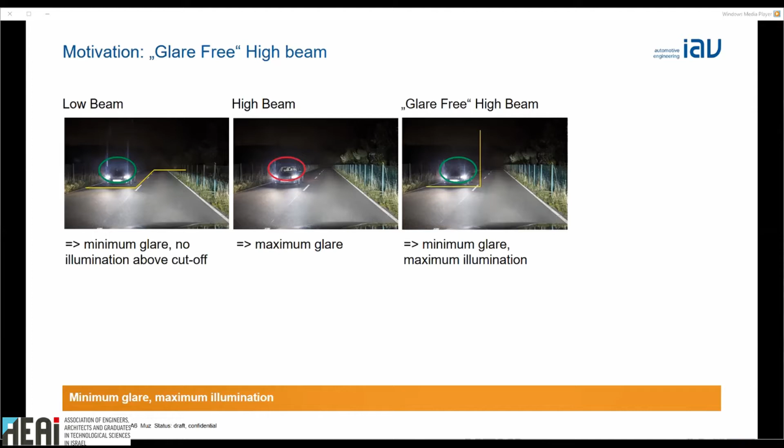And so the glare-free high beam was invented. Here only the part where the oncoming car is detected is dimmed, and the rest of the traffic space above the cutoff is still illuminated, so you have minimum glare and maximum illumination.

The first of these systems came into serial production 10 years ago, and they were mechanical, but we prefer digital systems in automotive industry. So we came to matrix beam, where you can turn on and off LEDs separately. The first of these systems had around 25 pixels, and there was an evolution to more pixels, so you can dim out very exactly and sharply. In the last years, some high resolution LED modules were developed, which will come into the car, into serial production within the next years.

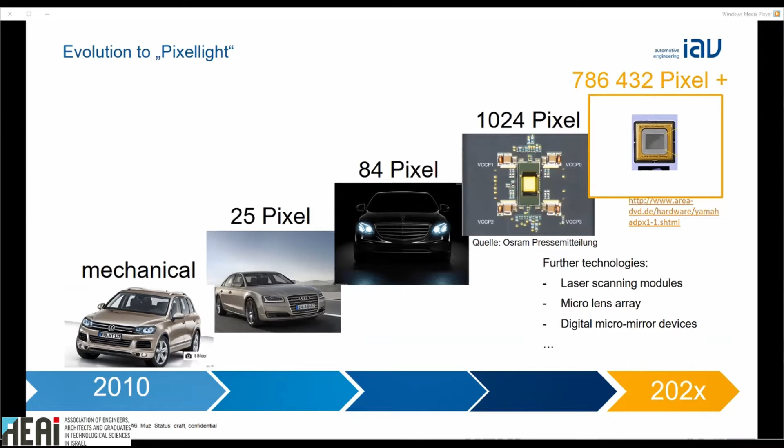One of our contributions to this development was the design of a test bench for dynamic tests on such LED modules. We did this in cooperation with Infineon. Infineon developed the LED module and integrated the micro AFS chip from Osram, and we designed this optomechanical setup in hardware and software, and also developed the test specification. As you see in the photograph, this LED module allows high resolution light functions.

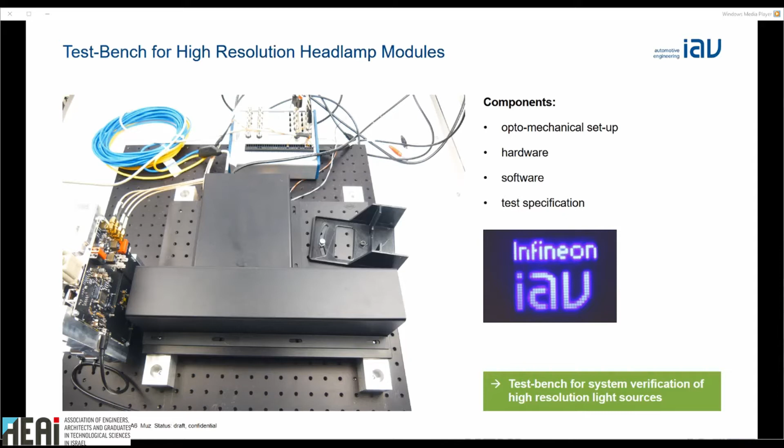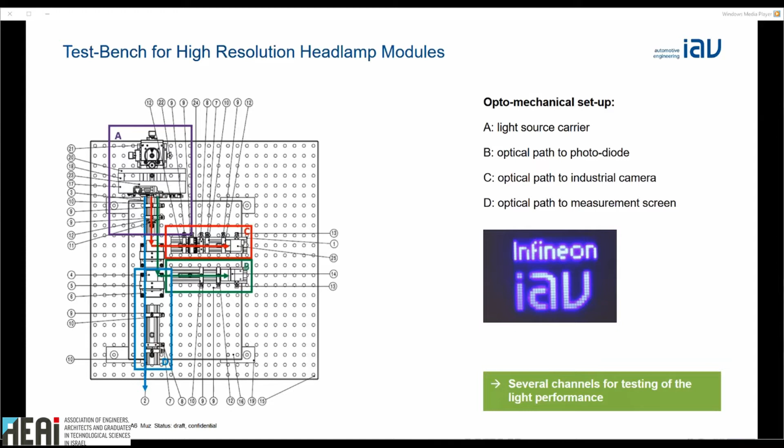Here we see a scheme of this test bench. The LED module is mounted at A, and then we have 3 optical paths. In B, we have a photodiode for integrated measurements of the light flux, and in C, an industrial camera for measurements in spatial resolution, and in D, we have a path to a measurement screen in order to make photometric measurements with a luminance camera, or in order to observe with your own eyes.

Not only the component is to be tested, but also the whole system, which consists of a sensor, normally a camera, and some intelligence located in the control units, and then the actor, the high resolution pixel light headlamp. Our solution is presented in the video on the next slide.

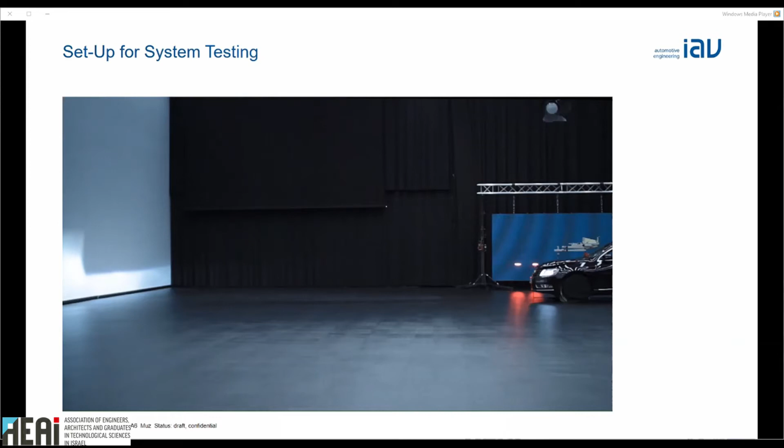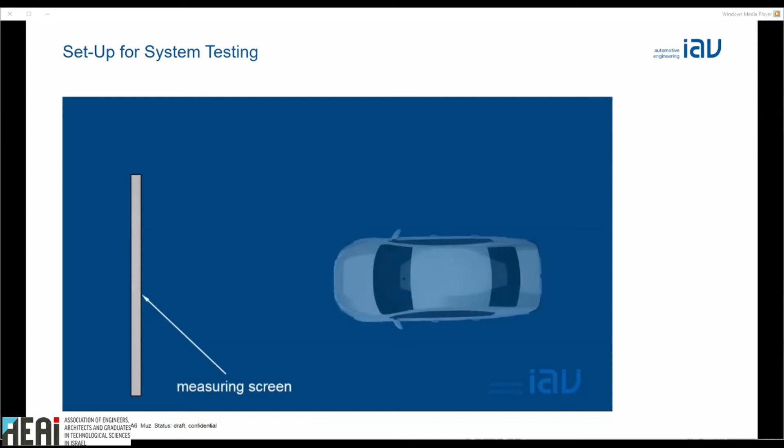On the left, you see a measurement screen, and on this measurement screen, the dynamic light distributions of the headlamp. In the background, there is an LED screen where we simulate the other traffic participants, and the LED screen stimulates the camera, which is located near the mirror.

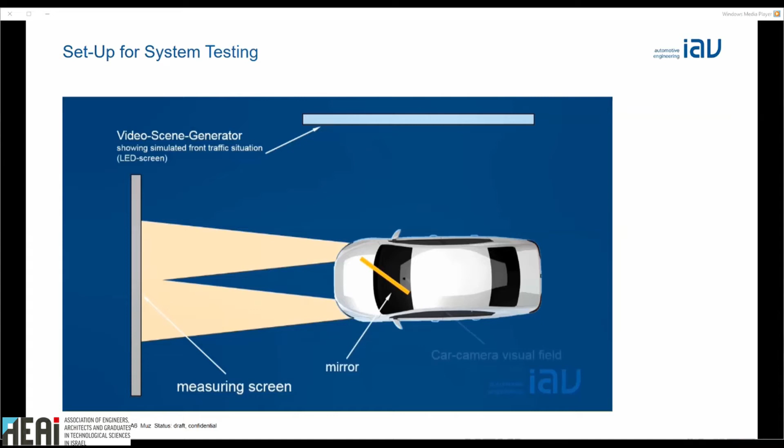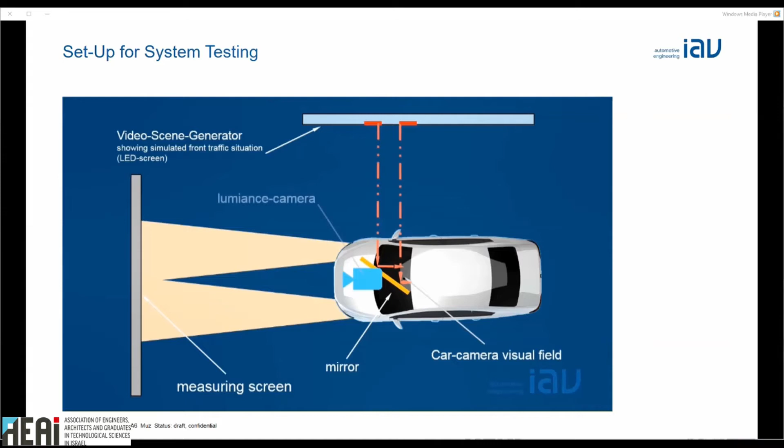We use a luminance camera for quantitative photometric measurements. This is how it looks like. You can use these quantitative luminance measurements as an input for light simulations in order to make a deeper analysis of your light distributions and the system.

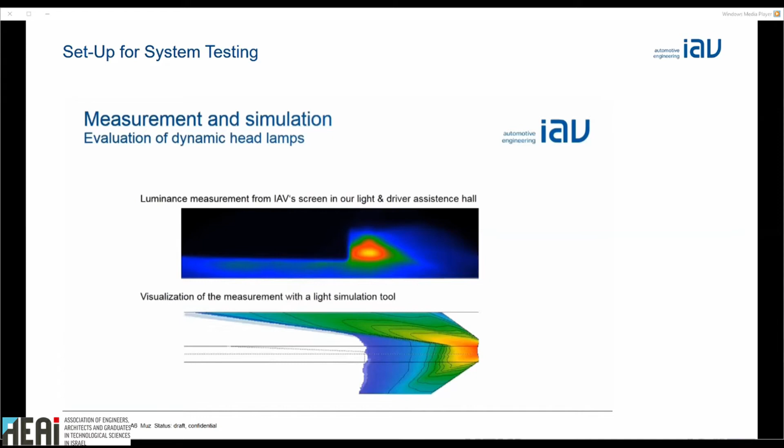There are still some challenges to solve. First, we have a parallax between the camera sensor, which is mostly located near the mirror, and the headlamp. So you have to make a coordinate transformation in order to dim out the right part of the traffic space. The object detection is a challenge. And we have to answer the question where the intelligence of the system is located and how the data are transported from the sensor to the actor. And when we have pixel light systems, this is, of course, masses of data.

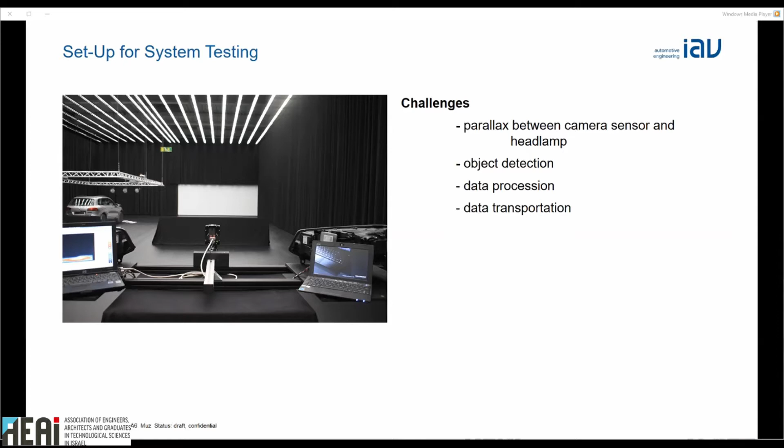Now I would like to give some solutions. We are talking about automatic driving in level 4 or 5. This means highly automated or autonomous driving. Here we require a lot of sensors in order to sense all of our traffic space around us, and maybe these are 50 or more sensors. We see that the lamps of the car, which are located at the edges of your car, are strategic positions for perception for most situations. So we made a project with ZKW, the project Dragonfly, and here we integrated sensors directly in the headlamp.

On this slide, we see some of our experiences in autonomous driving. One is the Renault Symbioz demo car, and another is our HEAT project. This is a bus for public transportation, and it is moving automatically in Hamburg HafenCity.

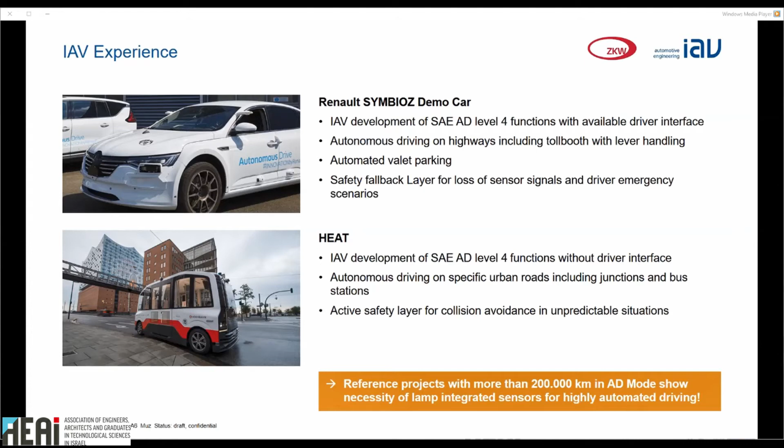Another use case are the advanced light functions, and so I come back to the first part of my talk. The camera, the sensor, the ECU as intelligence, and the actor, the pixel light module, are located in one housing, and you solve a lot of problems. You reduce the complexity of your system, and you also have the same optical axis for the camera and the pixel light module.

So the world is much better now. Now my time is over and I have to summarize.

I showed that high-resolution headlamp modules are new technologies which give the opportunity for new dynamic light functions. We developed test setups for dynamic component and system testing. I showed some challenges and gave an example of how these challenges can be solved. And I showed a concept for sensor fusion for highly automated driving. Many thanks.

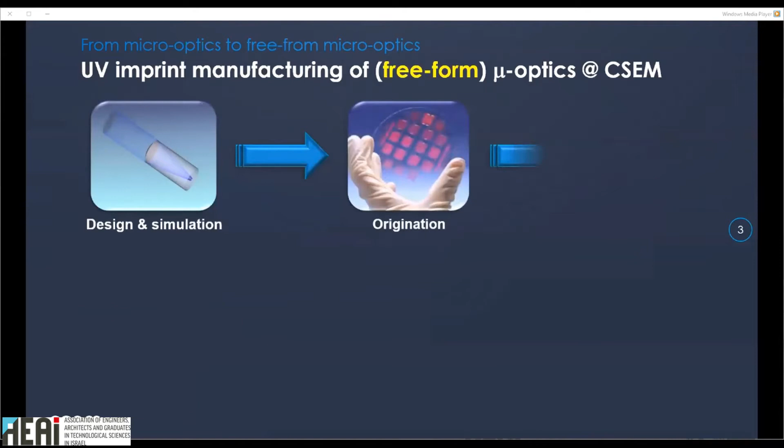First, let me introduce my company, which some of you may not know. CSEM is a Swiss private company, non-for-profit, that deals with technology transfer. We develop technologies and technology platforms that we then transfer to industry. The activities I'm responsible for are in the field of micro nano optics. How do we do micro nano optics at CSEM? We do it by UV imprints.

We start always from designing and simulating the structures that we want to fabricate. To fabricate the structures, we produce what we call an original, which contains the original structures we want to fabricate. It can be, for example, in glass or in quartz. Out of this, we produce a nickel shim, which is the tool we use for production. To produce the structures, we put a UV imprintable lacquer on a substrate, then we come with the tool, press, and shine UV light. When the light is absorbed, the photopolymer is cured and hardened. Then we demold and the structure is transferred onto the substrate.

We can do this for prototyping on 6-inch wafers, but we're also pushing forward our capabilities and bridging the gap between prototyping and volume production in two ways. On one hand, going for larger surfaces — we are installing new machines these days from a company called Morphotonics, which is a roll-to-plate machine that will allow us to go broader than 6 inches. We are also pushing forward in the Death Valley between prototyping and production, which is the piloting phase. When it comes to volume production, we transfer the production to our industrial partners.

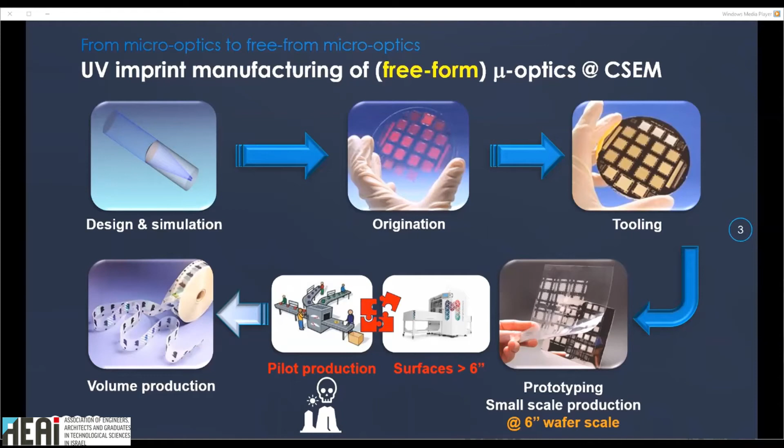And we are nowadays pushing this, after several years of experience in nano and micro optics, into the field of freeform micro optics, where we are leading a European project that is meant to set up a pilot line for the manufacturing of freeform micro optics, Fabulous. Before telling you about Fabulous and how it's linked to automotive lighting, I would like to tell you about freeform micro optics.

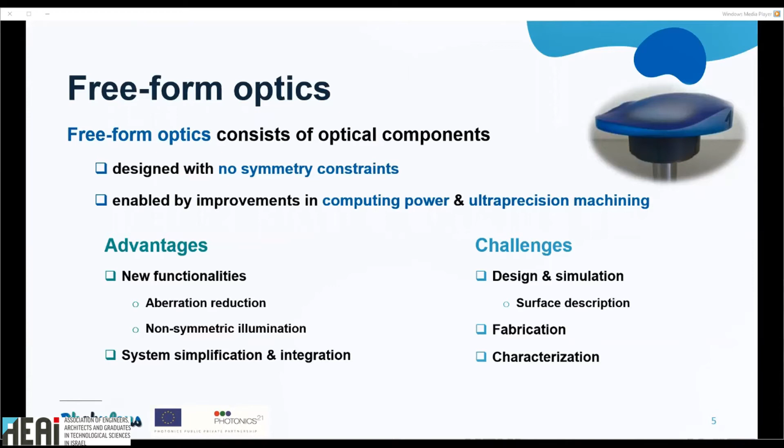For sure you know freeform optics, which is today a product reality in automotive lighting. These are optical components where you remove any symmetry constraints on the surfaces. What you can do is add new functionalities, simplify your optical systems, and easily integrate these new optical systems, for example, in lighting systems containing LEDs.

You also know micro optics. These are, in general, for example, microlens arrays that allow you to miniaturize your optical system, add new functionalities, go for low weight and large area optical elements, which can be flexible or conformable, and low cost at mass production. Now you put together the two domains and you have freeform micro-optics.

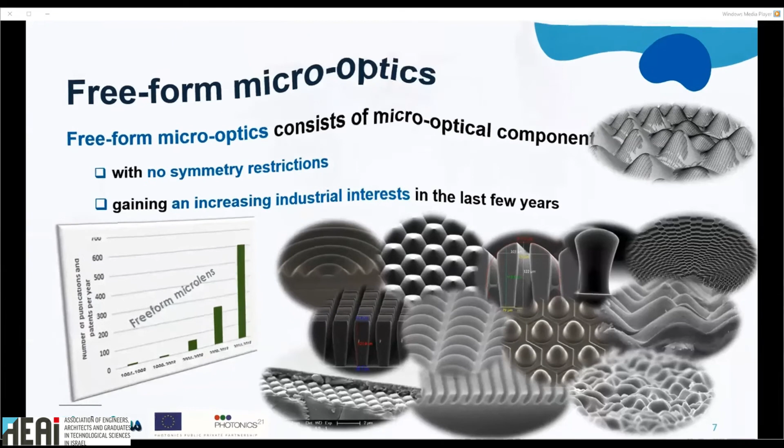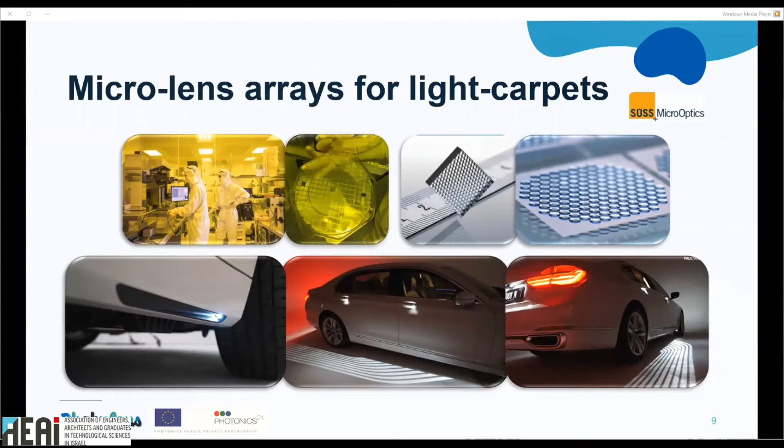But this is actually booming as a field. And today, more and more companies are looking into freeform micro-optical components also to be integrated into other, more functional elements in the car, like headlamps. This is, for example, the objective of Hella, which you for sure know, one of the use case partners in Fabulous.

I will tell you in a few minutes what a use case partner is. But the objective of Hella is to look into freeform micro-optics for automotive, especially automotive headlamps, with the idea of manufacturing or enabling the manufacturing of these innovative components that are meant to reduce or simplify the optical systems integrated into the headlamps and improve their efficiency.

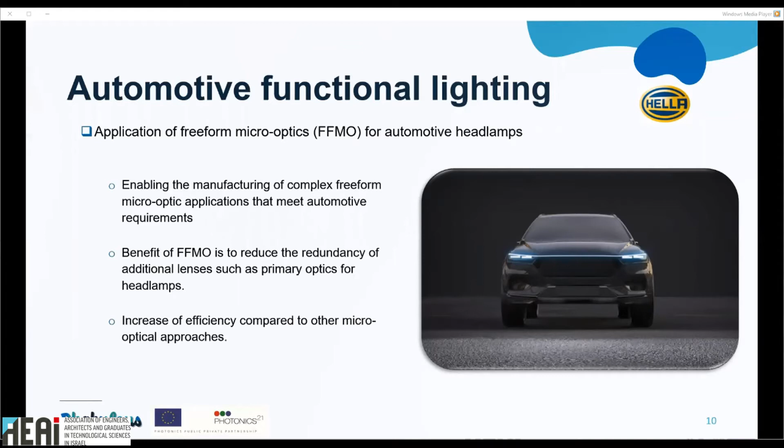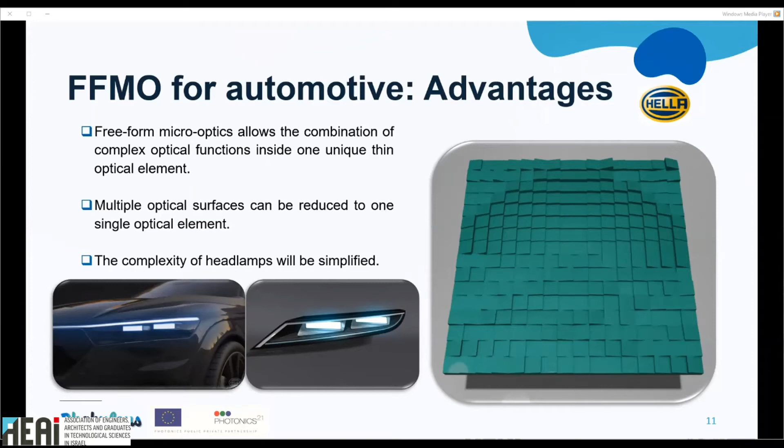Here you see the advantages identified by Hella for freeform micro-optics applied to headlamps. In general, it goes a lot with the simplification of the optical systems, combining different optical functionalities in one single element. You can also combine several optical surfaces into one single surface. In the end, your complex optical system is simplified, easier to integrate, which reduces the cost of production, but also allows you to produce new, more efficient lighting products.

The idea of Hella in PHABULOuS is to explore freeform micro-optics, or the manufacturability of freeform micro-optics, for two functions in headlamps: low and high beam. The idea is to have headlights with uniform appearance in on-off state, with high beam and asymmetric low beam, low stray light, homogeneous light distribution, a very compact system, and low weight. That's the objective. And actually, before getting there, you have to manufacture these optical components.

And it's here where the problems, let's say, in general start, because fabricating freeform micro-optical components is not easy. It requires access to very advanced technologies, and the value chain to produce these components is broader than a standard value chain for micro-optics.

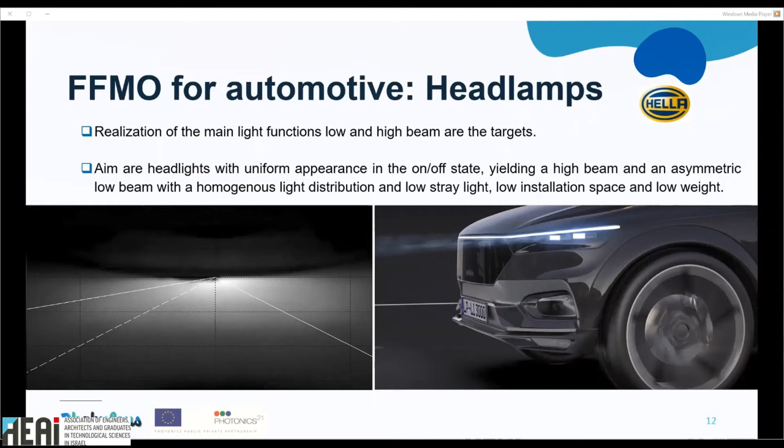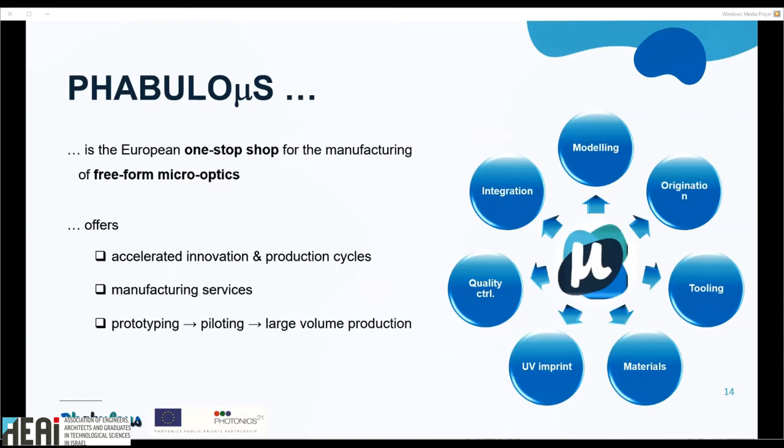So what's PHABULOuS, and how can PHABULOuS help put on the market new products with new freeform micro-optical components? PHABULOuS is a one-stop shop for the manufacturing of freeform micro-optics, offering accelerated innovation and production cycles, manufacturing services going from prototyping to piloting to large volume production. PHABULOuS was born at the beginning of 2020 as a European project that got 15 million in funding from Brussels in order to set up this distributed pilot line.

What is a distributed pilot line? A distributed pilot line is a pilot line where each element of the value chain exists in a specific place, but not on the same spot. So there will be several partners, distributed in Europe, each mastering one element of the value chain. Putting together these partners, we'll have a distributed pilot line. There is another set of partners that we call the use cases.

So what we are building is this value chain that you can see on this slide. We'll cover the entire value chain for production of freeform optical components, going from modeling to origination, which is one of the bottlenecks, where we have access to a lot of different technologies to originate these small micro-optical elements with no symmetry constraint. Tooling, because most of the time you originate these elements on very tiny surfaces, so you have to extend the structured surface to address the size required by your product. We do this with additional processes like step and repeat.

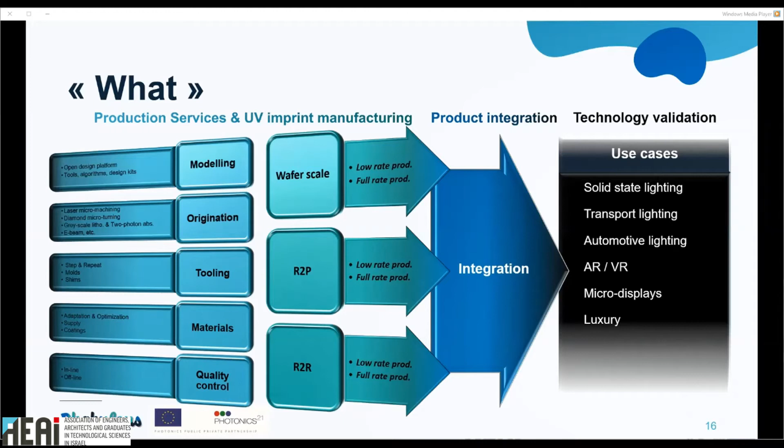We go into production with 3 pillars. We go at wafer scale, on wafers up to 8 inches, with SUSS MicroOptics. We go to roll-to-plate with Morphotonics, so the structure is on a roll that deposits the structure onto the surface of a plate. Here we can go up to A3, for example, even broader, up to 1 square meter. And when you want to go to really square kilometers, you go to roll-to-roll, where we have a partner in Finland called Nanocomp. And then we integrate these elements into the products.

How are we building the pilot line? We are building it in 2 different phases. The first 2 years are devoted to the pilot line setup, so we are really linking all the elements of the value chain to be sure we'll have a smooth process workflow from modeling up to production and testing.

And this we're doing, as said, with the help of the use cases that tell us what is compatible or not with their production or product requirements. In the second phase of the project, years 3 and 4, starting from the end of this year, beginning of next year, we will open calls for what we call pilot cases. Pilot cases are companies that today are already willing to have prototyping or piloting of freeform micro-optical components for their products. They will apply for prototyping or piloting runs on the pilot line.

If they are chosen, the advantage is that part of their work will be funded by the pilot line itself. And the win-win situation is that we will work in close collaboration with these pilot cases, and we'll ask them to give us feedback on our production processes, but even more on our business model, because the pilot line is meant to survive after the 4th year of the project and remain a self-sustainable pilot line serving the European industry requiring freeform micro-optical components.

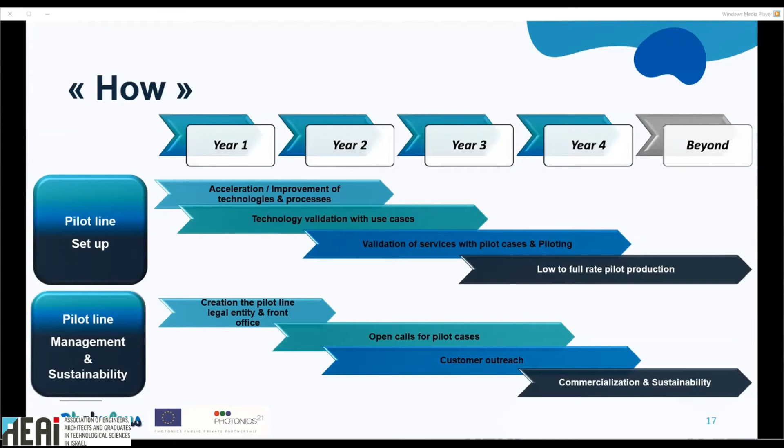This can be very cumbersome and time-consuming. This has 2 side effects. On one hand, it prevents certain companies from having access to this technology. On the other hand, it prevents the technology providers from increasing their business. So the solution we propose is to have one entry point with an optimized value chain behind it, already optimized for the real production of freeform micro-optical components.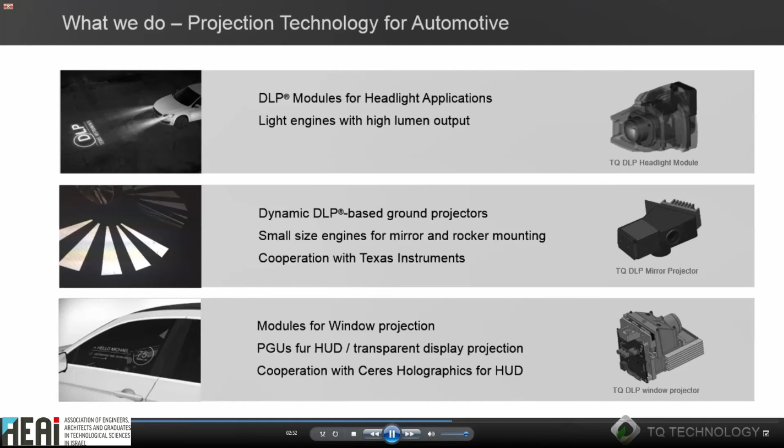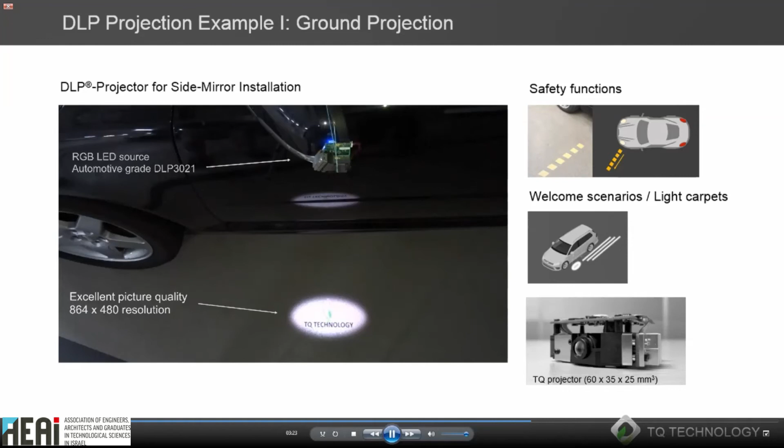Here's an example of a DLP projector used for side mirror installation. These projectors need to be very small size, compact, to fit into an automotive side mirror. All the components have to be automotive grade, including the DMD itself. The electronics configuration is also optimized for small size and low cost, meaning we are using an FPGA configuration to control the DMD, and using pre-installed video sequences that the user can select.

These kinds of projectors reach up to about 100 lumens, so they're not only used for logo projection, but could also be used for safety functions like projecting an indicator onto the street, or for welcome scenarios and light carpets.

Next, one further example of DLP projectors being used in automotive application is a so-called in-plane head-up display. We are working very closely with Ceres Holographics, using their holographic foils as the combiner element for the head-up display. Opposite to other head-up displays, this is so-called in-plane technology, meaning the image or display appears in the plane of the windshield, but the technology allows extremely small package volumes with a very large field of view.

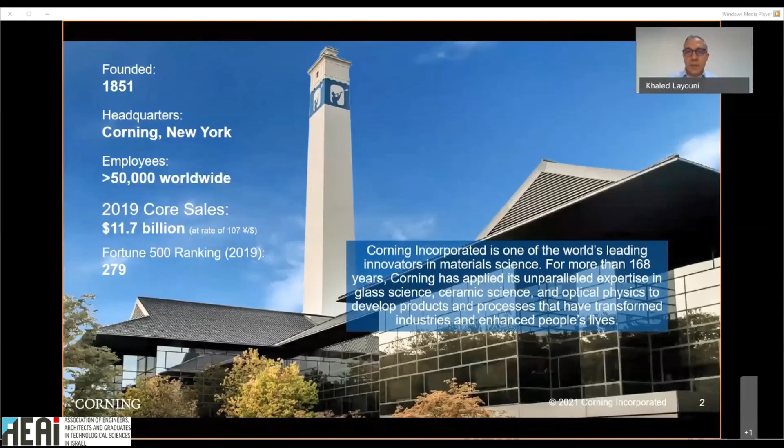Many of you may know Corning. We've been around for 170 years, paving the way for groundbreaking innovations that have transformed the way we live. We are heavy players in the display industry with our glass innovations, and you may have recognized Corning Gorilla Glass, which has been featured in more than 6 billion consumer electronics devices worldwide. You use your phone every day, and it's likely it has Gorilla Glass on it.

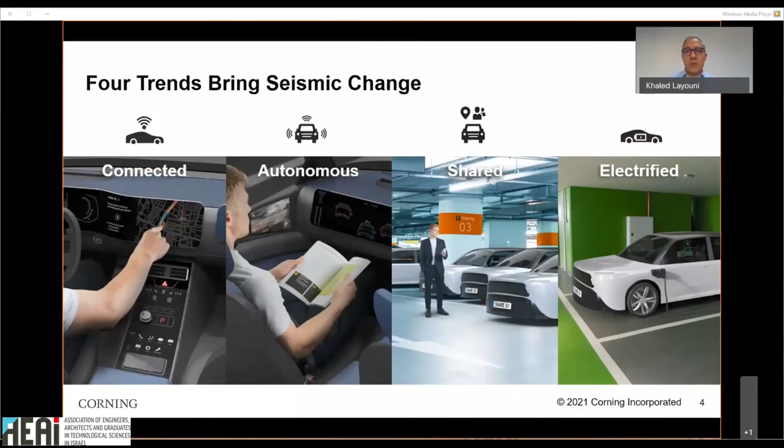If you're like me, you also interact with your vehicle every day on your daily commute to work, and often for prolonged periods during weekend getaways. Today, innovation inside automobiles is accelerating at a faster speed than ever before. The reason? Something industry experts call CASE, which stands for Cars that are Connected, Autonomous, Shared, and Electrified. Consumers are not buying cars based solely on horsepower or the exterior look anymore. They are buying based on the design of the car interior. They want the experience, interaction, and connectivity they are used to from their smartphones inside their vehicles.

We were pulled into this opportunity rather quickly because we helped create the ecosystem. Through our display glass and glass for mobile consumer electronics, our expertise makes us a key player in this space. And thanks to our reputation as a company that can deliver solutions and work with customers to deliver on their design needs, automakers and customers are pulling for our glass as an innovation that can deliver on these four trends.

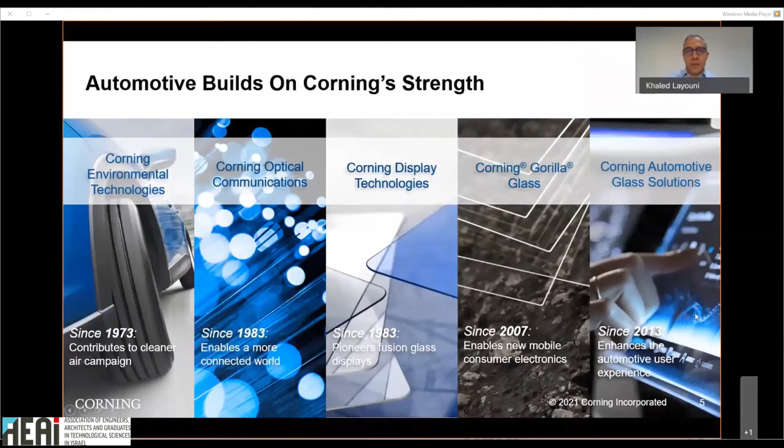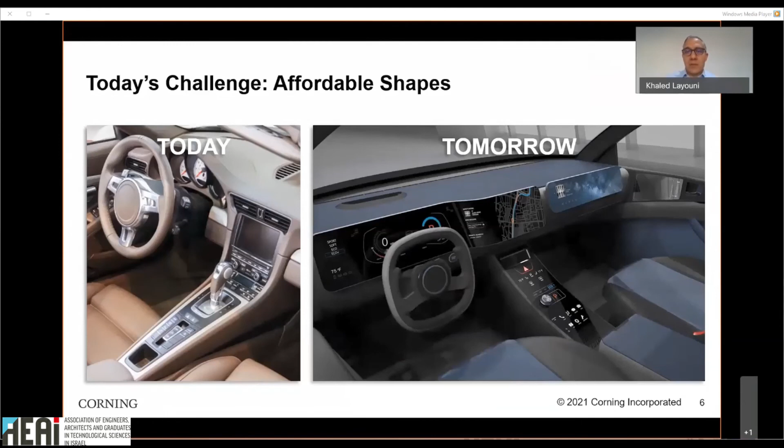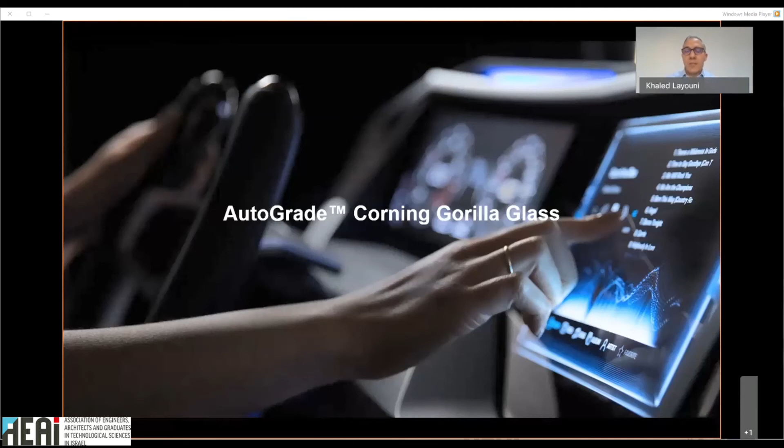We invented auto-grade Corning Gorilla Glass, a product we announced in 2019, which is the cousin of the glass on your smartphone. But there is one catch: it has been specifically formulated and optimized for automotive interior applications.

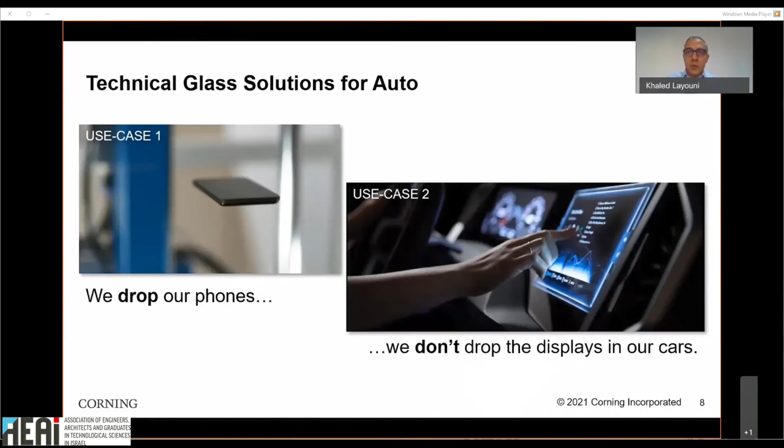Let me explain. Our cover glass expertise in automotive systems comes from our experience in mobile consumer electronics, with one key difference: you can drop your phone, but you're not going to be dropping the display in your car. My team and I underwent extensive testing in our labs to fully understand the use case and its reliability requirements.

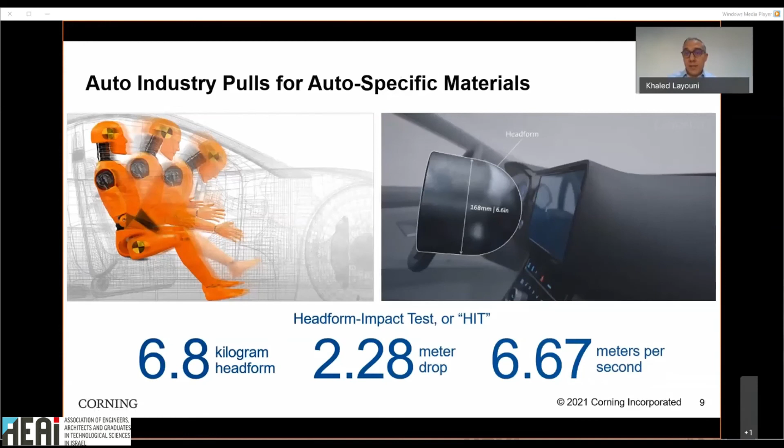Imagine a car accident where a passenger propels forward upon impact and risks hitting their head on the dashboard. That's what the head-form impact test simulates. During a hit, surfaces in the dash should not break in a way that could harm the occupants. These are demanding standards, and they are held worldwide.

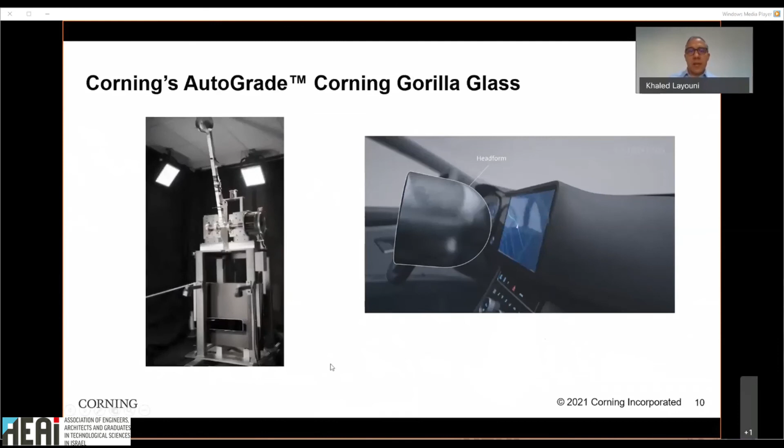Like our other technical glass for other use cases, our auto-grade Gorilla Glass has something we call retained strength. But this version of retained strength has been tuned to help our glass survive a hit. Just watch this video: our glass absorbs the force of the impact in a sense which helps prevent breakage of the cover glass. It looks like the display was not so lucky.

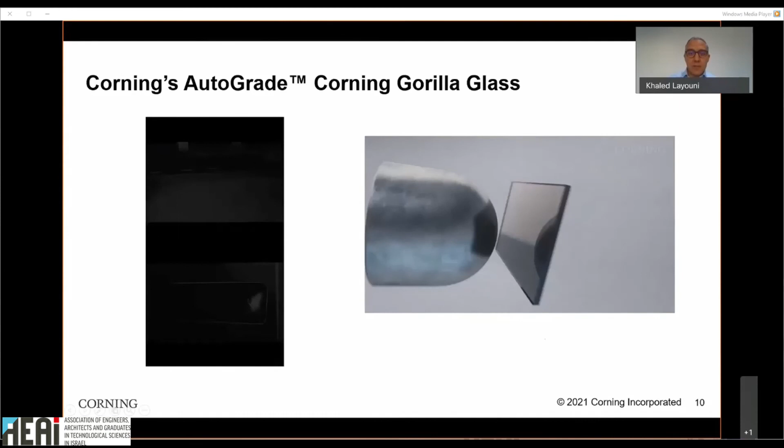Now let me show you what's happening to the glass during an impact event such as this. The glass is under bending, which puts the flaws under tension. Our auto glass was designed to prevent flaw propagation under such an event and hence survive the hit.

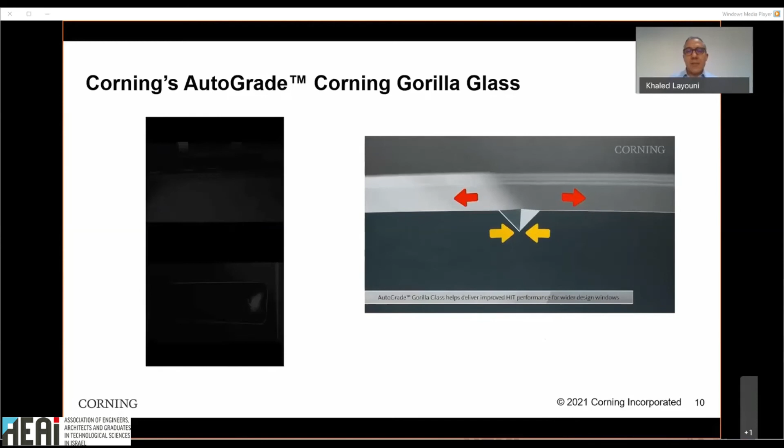What's important to remember about our extensive knowledge of hit testing is that it applies to the system as a whole. Customers that abide by our carefully calculated design guidelines can expect a superior cover glass product that fits the automotive use case.

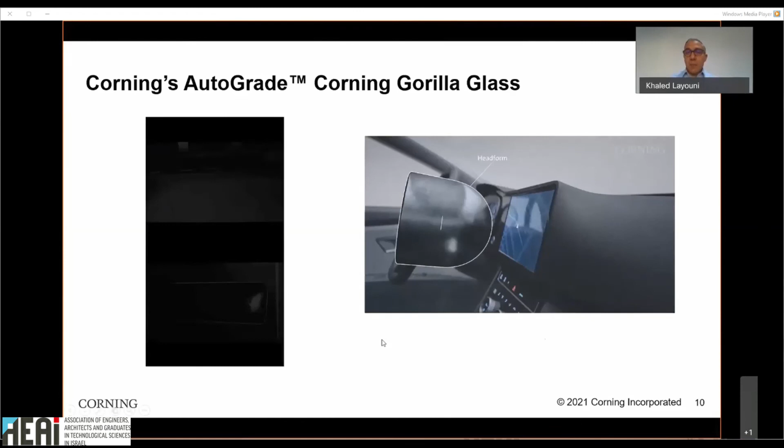My expertise here is in the science of glass breakage. What we've learned over the years is that glass normally breaks because flaws have been introduced during the manufacturing process, handling, conveyor belts, and traveling through the supply chain. Fracture mechanics can help predict glass strength. In fact, when a load is applied, the cover glass can resist until the stress intensity factor reaches a critical value.

Cover glass breaks during the head-form impact because stress has been applied to its existing flaws, which get pulled on and essentially break, causing the glass to crack. Flaws are for the most part unavoidable, and our auto-grade Corning Gorilla Glass formula, from the glass composition to the chemical strengthening, is designed to withstand the stress during a hit.

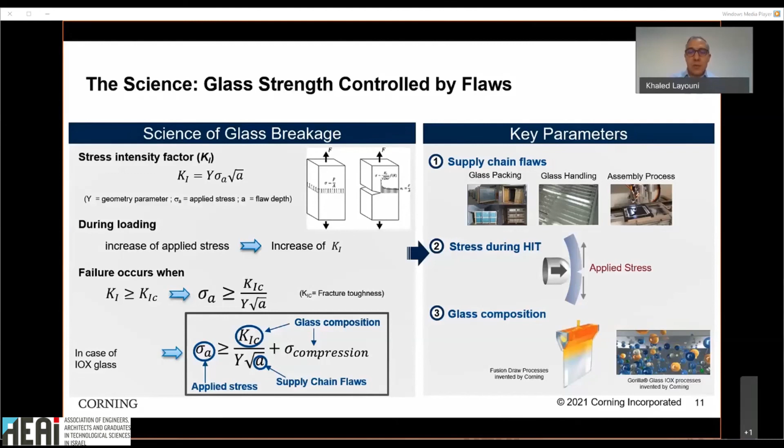An exciting challenge for Corning that really pushed the boundaries of what's possible with glass is when you introduce shaped modules to these vehicles. Back to my original point: consumers are beginning to base their vehicle buying decisions on the interior design of the car. This means many automakers are working on design differentiation to attract these choosy buyers.

There is a way to achieve these new and innovative designs with glass using Corning cold form technology, which we showcased just last year with GAC at the 2020 Consumer Electronics Show in Las Vegas.

Our technology is different because it starts as a flat piece that can bend into its final shape, versus the traditional way of making shaped glass parts, which requires expensive hot molding and tooling. By traveling through the manufacturing process in its flat state, our finished glass part has more uniform optical coatings and is produced at higher yields, which dramatically impacts the final price for our supply chain partners and thus automakers.

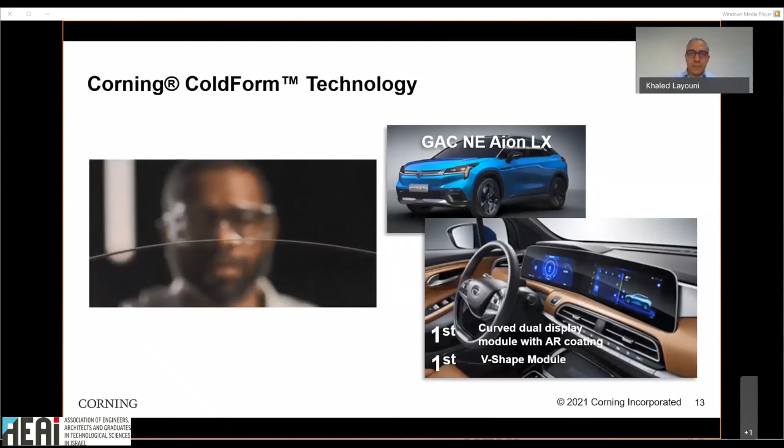We've compared our technology with traditional hot forming, and the value is clear. We can achieve superior economics for our customers and enable improved optics performance, all enabling automotive interior systems to pass HIT testing without glass breakage.

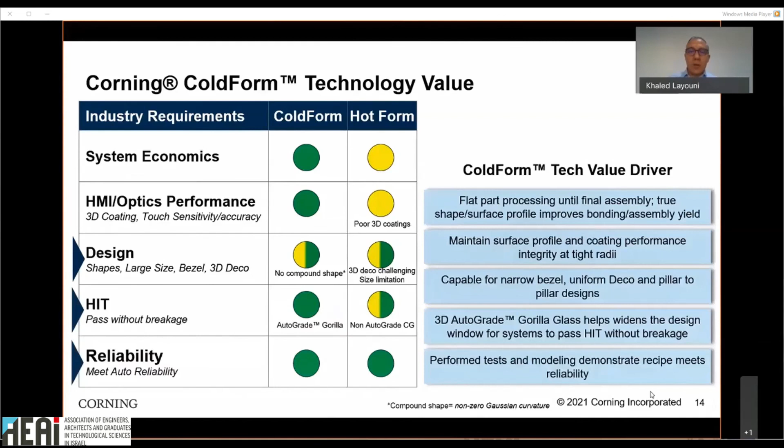Also, our 3D ColdForm technology has successfully passed stringent reliability testing according to many OEM standards. We've combined our auto-grade Corning Gorilla Glass with this innovative bending technology to help enable a new wave of interior designs with clear benefits.

We designed our glass and developed a shaping technology that enables us to ship glass in a flat state for bending into its final shape once it reaches its destination. In addition, we share our glass guidance with customers to help them produce high-quality automotive interior systems that pass HIT testing.

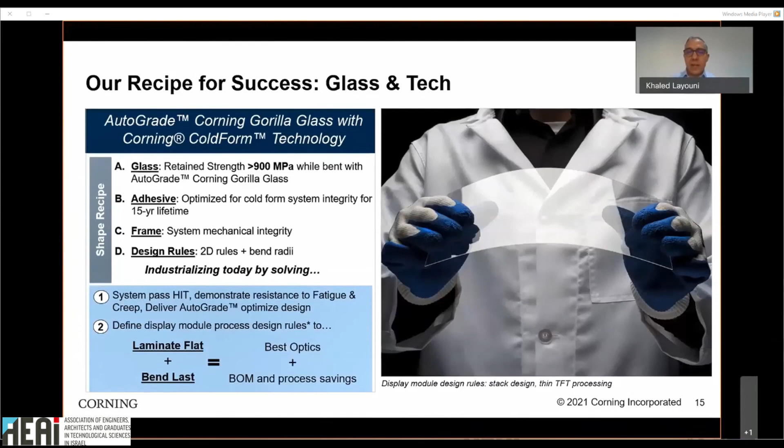The auto industry has reached an innovation inflection point, and we're standing at the ready with new manufacturing capabilities in Hefei, China, and strategic collaborations across the industry. We see an exciting future for glass in the auto industry as it solves CASE trends and steep advancements at a pace the industry has never seen. Our 170 years as a company make us old and experienced, while our industry knowledge and business portfolio makes us innovative and agile. We're excited to see how and where the auto industry moves and are certainly prepared for the ride. Thank you for your attention.

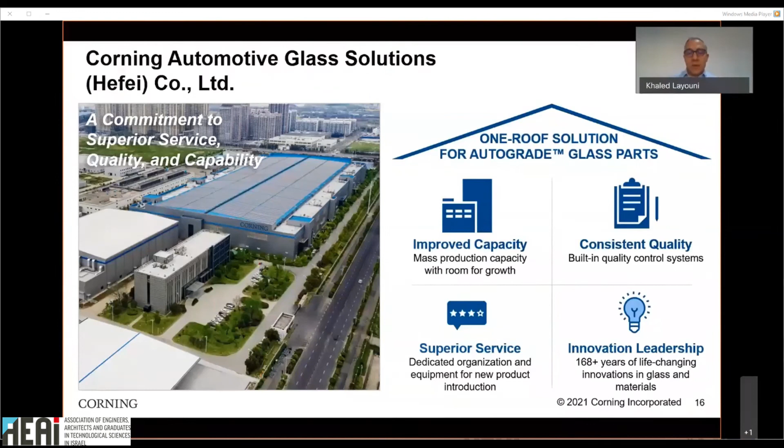Mr. Layouni, thank you very much for your presentation, and thanks for being here with us this afternoon. Everybody else in the audience, please use your chance to address your questions using the chat or the Q&A. In the meantime, I do have a question again: what are the sizes of glass structures that you foresee within the car? Of course, we have seen this big display glass, but are you also supplying smaller displays or even larger ones? What do you see in the future?

So we are covering all the sizes that are possible in the market. Most of the sizes probably are less than 800 millimeters, but we are capable of making pillar to pillar, which is 1.5 meters apart. You are mentioning the big display size that we have seen recently, and actually Daimler Mercedes-Benz chose Corning Gorilla Glass for automotive interiors for its all-new EQS Hyperscreen, which is the largest monolithic glass part to be featured on the market. That was Corning Gorilla Glass, actually.

And in this conference today, we have seen a lot of sensor companies, photonics-based sensor companies for the interior and also for the exterior of the car. Why should they contact you early on, maybe in their development process, to include your latest technology in glass?